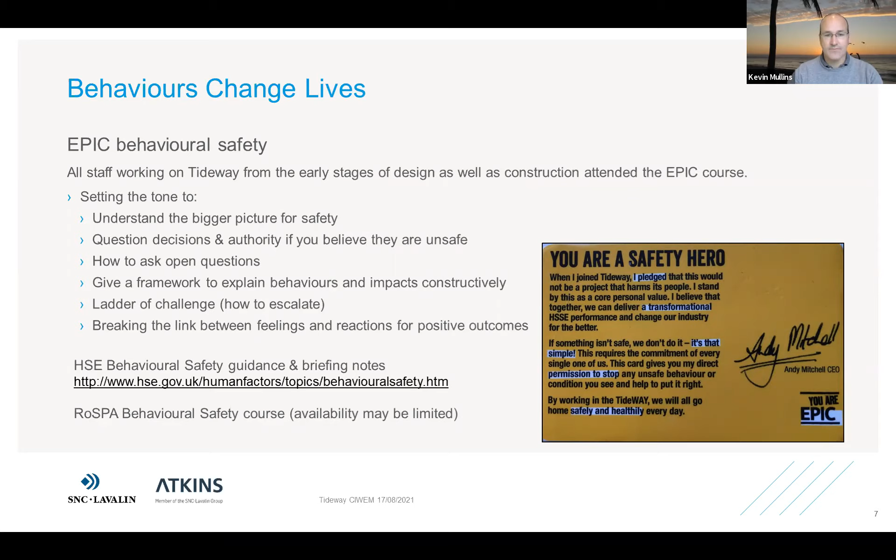So the project itself is split up into 3 sections: west, central and east. Each of them have their own challenges, not least of which is the geology. The main tunnel itself, stretching from Hammersmith to Abbey Mills, is 25 kilometres. The diameter is between 6.5 to 7.2. I believe the standard measurement for these is double-decker buses, so you can fit 4 double-decker buses within the cross-section

of the tunnel. And it falls from the west all the way to Abbey Mills pumping station in the east, where it connects to the Lee Tunnel, which has already been constructed and conveys sewage flows out towards the Beckton sewage treatment works. When completed, the tunnel itself will be able to hold 1.6 million cubic metres of water or sewage. Again, the standard unit of measurement for this is Olympic swimming pools. So it'll be the equivalent of 600 Olympic swimming pools.

Stuart and I were involved in the west section as part of the Atkins Arab joint venture. I'm going to just go through a very high-level background. At the end, I have a link to the Pipeline Industries Guild talk by the Tideway West engineering manager, Colin Murphy, who provides a lot more detail about some of the background information should you wish to investigate that further.

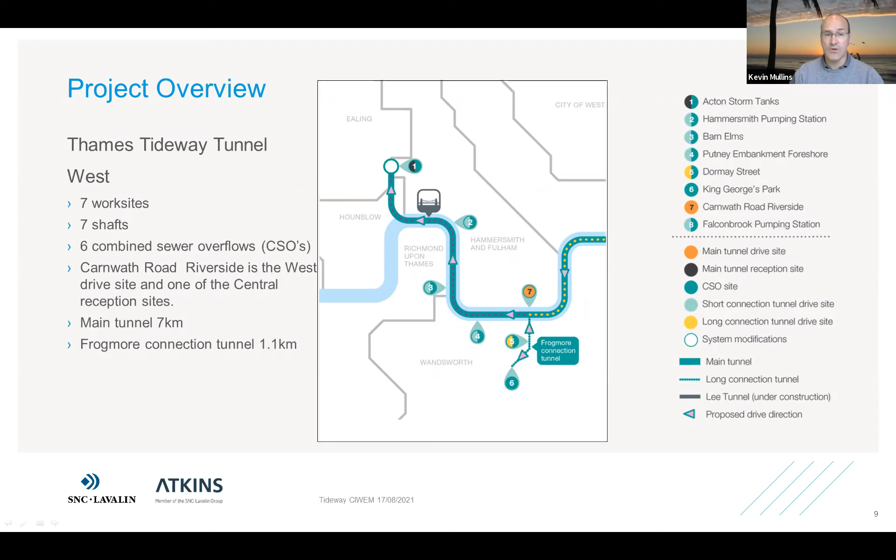I started the tender on Tideway in 2013, and upon planning approval in 2014, we were awarded starting works in 2015. At the moment, the west and central sections, the tunnelling has been completed, and the secondary lining is being installed, with the east section well underway as well. It's anticipated that all works, including commissioning, will be finished by 2025.

So why did we need this project? The main aim is to improve water quality. London is a conglomeration. Very much it was built up rather than planned. And a lot of the rivers of London were subsequently culverted over, and what were the open sewers became culverted sewers, and then placed into the river through overflows. The Thames Tideway project aimed to reduce the number of CSO discharges.

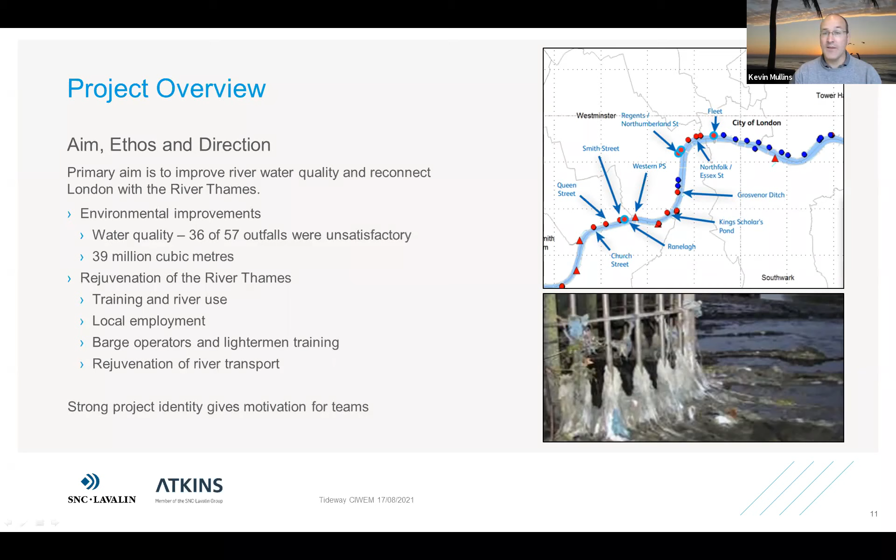And not just here, but there are many high-profile locations. So Putney is the location of the university boat race where they start, and there was a condition that the site would be required to be used by the boat race to start. As it happens, due to the COVID shutdown, the boat race hasn't taken place, but provisions were in there in order to protect the markers for the boat race and to be able to shut down site operations. And similar provisions were in place for the Chelsea Flower Show and other key events down the river.

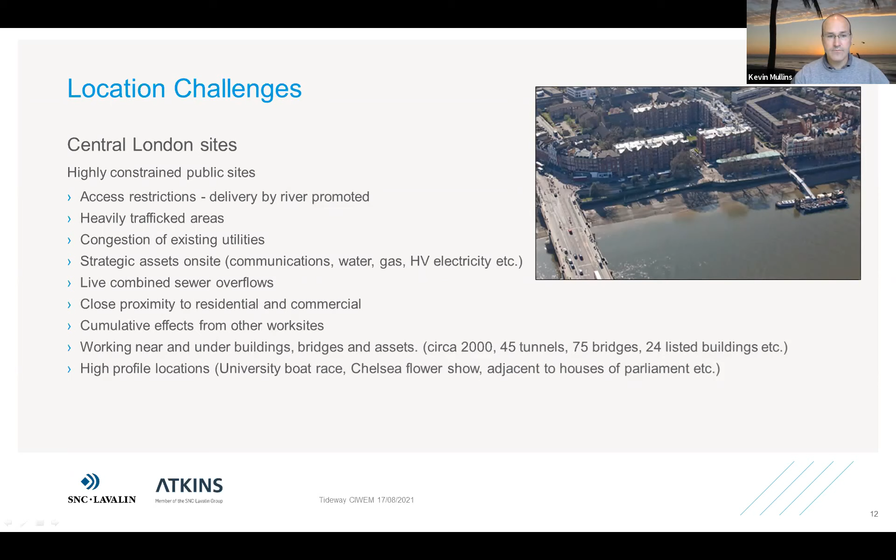So what does a site look like? Using Putney as the example, the main sewer is within the embankment or the road itself. And then there's an overflow typically, which allows the sewage to overflow into the Thames. And this is where we would capture it. In this case, we had an end cap, but other places we intercepted the overflow pipe or attached an interception chamber to the side of an existing pumping station, like at Hammersmith.

So the interception chamber here, underneath the bridge, allowed the overflows to drop down into the connection culvert, which linked the interception to the main site. On many sites, this was short, but on Putney, we had the existing slipway. The slipway was required for access, not just by boat users, but there's also a provision for river haulage historically to be able to access the river at this location. That meant there were a number of design challenges around boat loading, boat grounding, scour, and environmental reinstatement of the riverbed, which were all required to be managed as part of the design.

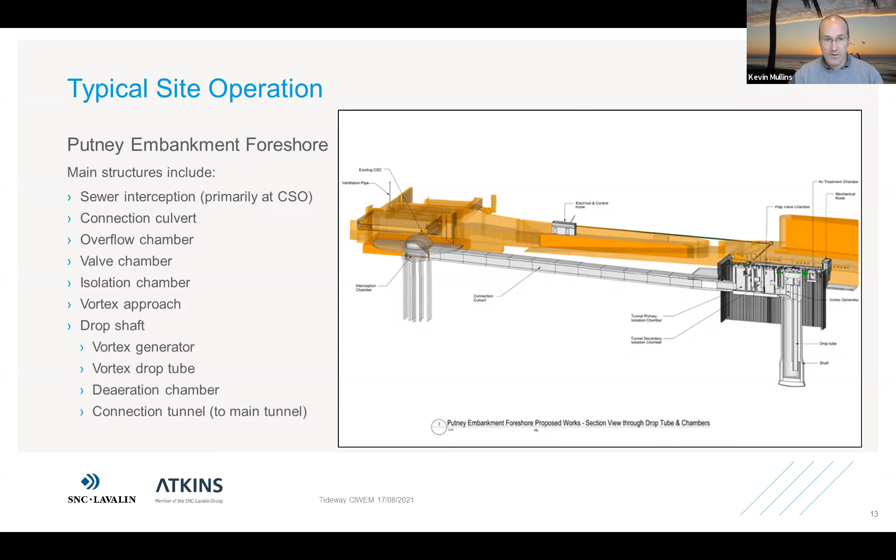Let me find my mouse. Okay, Stuart will talk you through the hydraulic principles. Thanks, Kevin.

Right, as Kevin said, we need to drop the flow from fairly high level, like near ground level, into the main tunnel. And we don't just drop it into the main tunnel, we drop it in a shaft, and then there's a little tunnel from the bottom of that shaft into the main tunnel. There are two real parts to these structures.

There's the top part, which we call the vortex generator, where the flow comes in through a tapering channel that's also sloped like a ramp, and that gives us a spin to the flow that then drops it down the drop tube to the bottom where we let all the air out safely, and then it's connected into the main tunnel. There was quite a well-developed reference design from Tideway, which we were given, but we then had to develop that into detailed design so that our colleagues in the joint venture, BAM Nuttall, etc., could actually build it.

So we were particularly interested in some of the geometry. We had quite onerous specifications on velocities, freeboards, gradients, make sure everything's self-cleansing, which leads you to certain velocities. So we used a whole host of industry standard methods, things like CIRIA 141 for sediment transport, to show that in that long section of culvert we wouldn't get things dropping out, that it would all make it into the vortex generator.

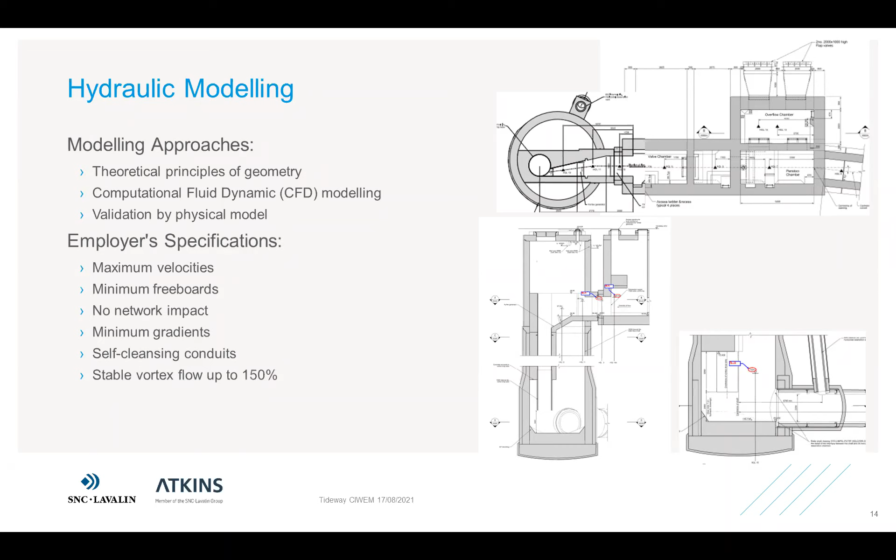So the ramp and the taper comes from a paper by Yu and Lee, Hydraulics of Tangential Vortex Intakes in Urban Drainage. That is the reference paper that the geometry is all based on. We did size these to meet certain client specific requirements, one of which is the 150% stable flow thing. The other things to note here are, as the flow comes down the ramp, we've normally got a hydraulic control and break point at the lip of that ramp, which it's important that we maintain, so that gives us a defined depth to flow ratio, so that if you can measure the depth, you can measure the flow, which is important later on.

But as the flow comes down that ramp and then hits the circular drop tube, it starts to spin, and you have to make sure that once the flow has gone through its first 360 degrees, the depth of flow in the tube isn't high enough to affect the upstream depth at the lip, so that at all times you know what depth you should be getting for a given flow rate. And I'll come on to that in some of the other things we did with CFD and physical modeling on how we validated all of that.

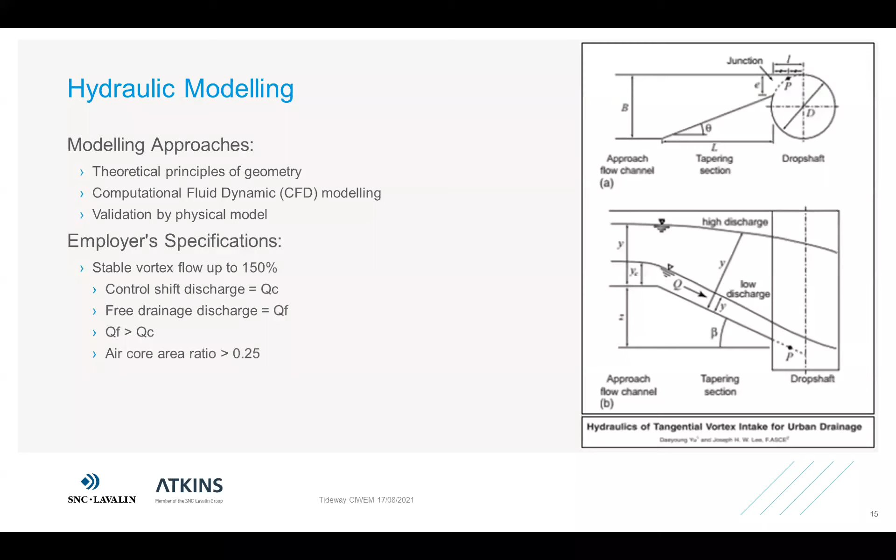Another client requirement was that the minimum width of the taper, I think, is 550 mil, so that it can't get blocked by large debris. So there are things over and above what's in the academic paper that as engineers we have to consider. So next slide.

So this is some of the validation that we did. We used CFD, and as Kevin has alluded to, the design team was a joint venture between Atkins and Arup, and it was a blended design team. So sometimes the CFD was done by Atkins, where we use STAR-CCM+, and sometimes it was done by Arup. They used a thing called OpenFOAM. And as Kevin will come to later on in the presentation, you didn't really know in the design team who people work for.

It was a completely blended team. So there we can see some of the standard sort of images you get from CFD, and also some of the physical model images. We'd also worked out, using traditional 1D calculation methods, what we thought the levels would be for given flows. And when we had that, we could then compare that with outputs from CFD and from the physical model. And we got very good agreement on that, which gave us the confidence that the design was robust.

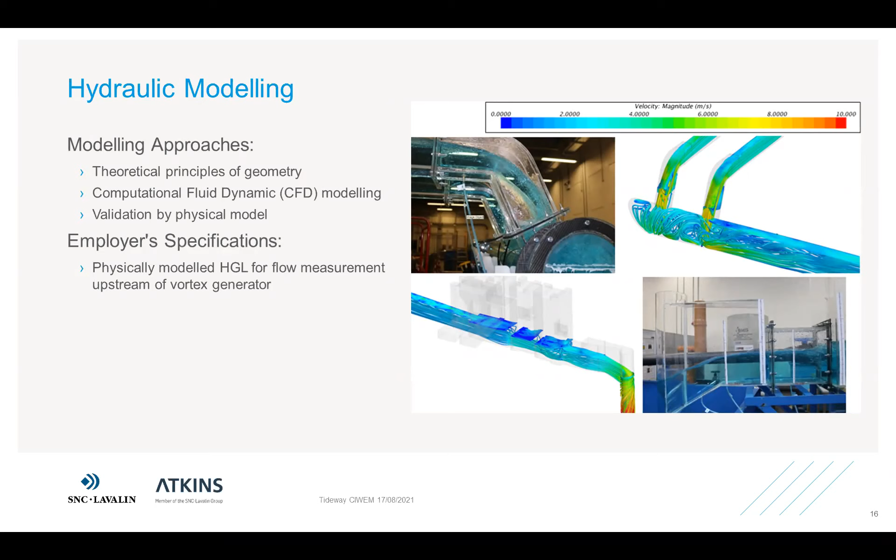The reference design had an external vent pipe as well, which meant it would be quite a difficult connection to make, because we've got to excavate down approximately, I think it was about 25 meters from ground level to where our little connection tunnel is. That was quite an awkward connection to make, and you'd also have to maintain it.

There were all sorts of discussions around how we could protect that, because the main shaft is inside a permanent cofferdam that was designed for certain barge impacts and things like that. But even then, we were worried that there was a point of failure with that vent pipe. So we thought we could maybe design that out, which led us on a bit of a journey. The starting point of that journey was to look at it in CFD. So we did it in CFD with and without, and that was telling us that we could probably remove it.

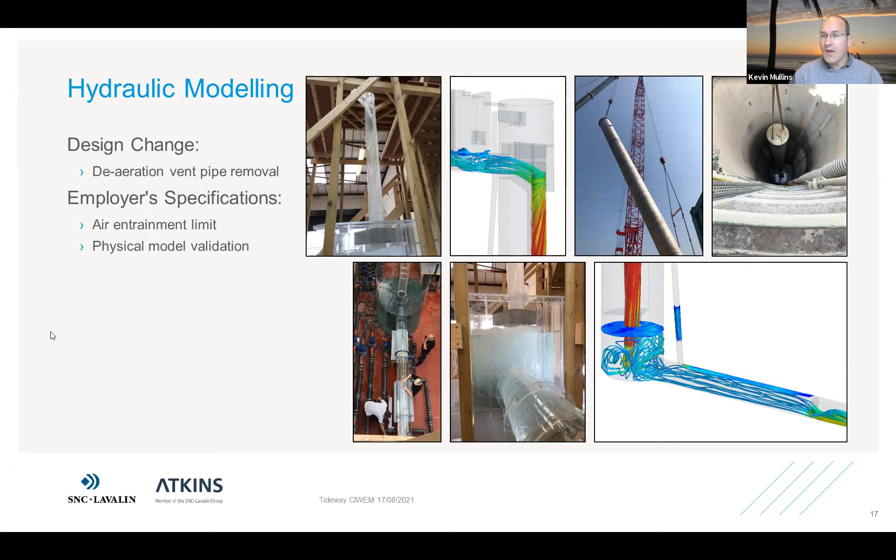The sheet piled elements also formed flood protection, and so they formed permanent works, but in the temporary case they were extended higher to form both edge protection and flood protection, and then they were able to be cut down to their permanent level to be retained for the work. So being quite efficient with as much of the permanent elements as we can.

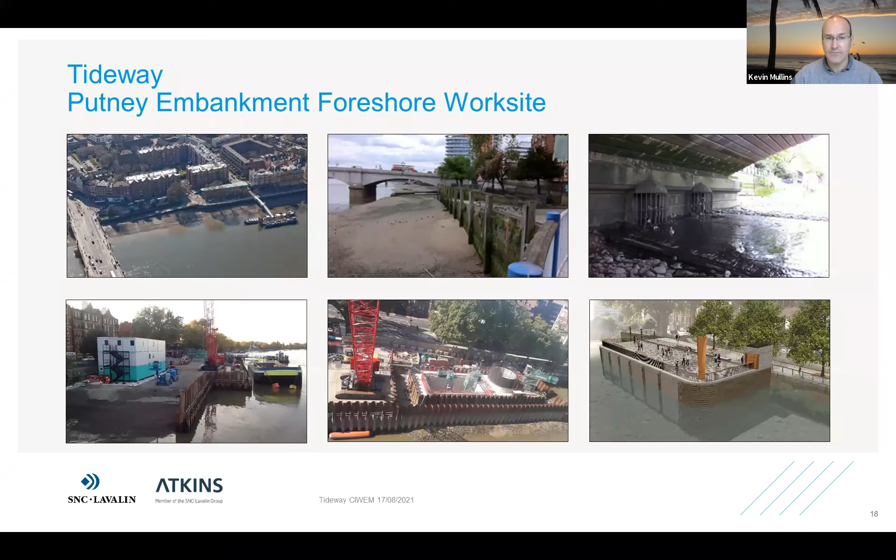Some of the problems we were facing as design challenges were differential settlements, with the large interception chambers wanting to settle more, and then the connection culverts wanting to be buoyant, and the differences between those needed to be tied in and managed in order to prevent any steps and allow the free flow of the water through. So with the more rigid connection tunnel, we were able to prove the beaching of vessels above resisted that. Because it was tied in, it resisted flotation, and we were able to manage the forces on the interception chamber, and tie that in and make it work as a whole.

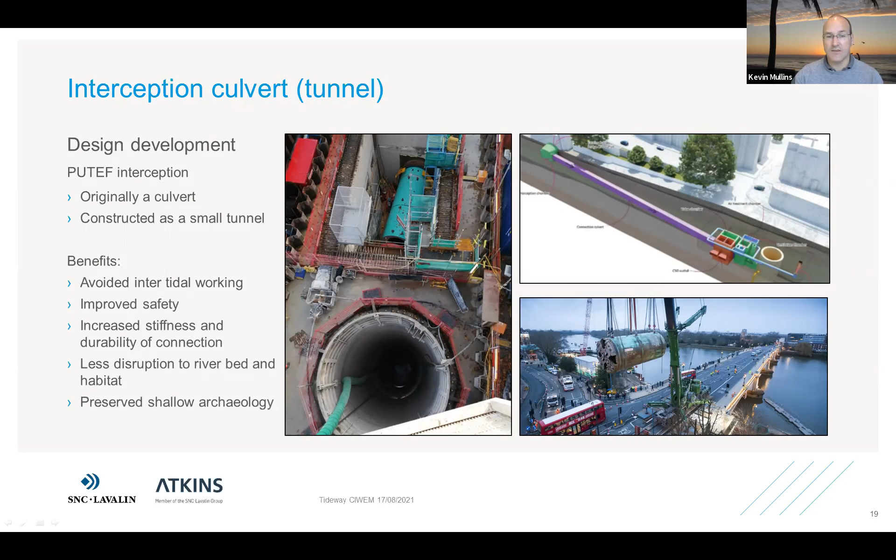Now, we didn't do this alone. The design venture was Atkins, a well-established partnership that had worked on Crossrail and other successful projects. And the tips are really an open and honest relationship, setting it up from the beginning to be collaborative, and having that willingness to share and collaborate over confrontation really set the scene for us to be fully integrated. And as Stuart was saying, quite often both Tideway and the contractors couldn't tell who was from which party because we were fully integrated through that team.

The contractor itself was a mixture of the three main contractors, BAM Nuttall, Morgan Sindall and Balfour Beatty, and they were also co-located with us in order to develop those joint methodologies and techniques. This was all facilitated by a common data environment, we used ProjectWise, and sharing the models to achieve BIM level 2 compliance.

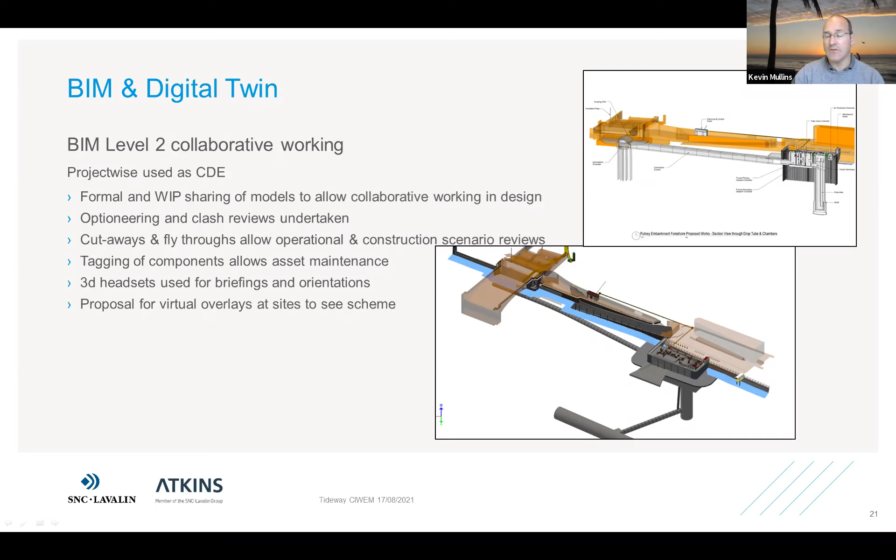You could then discuss what was observable from each of the platforms, and we were able to prove through the models the CCTV surveys, where we were able to drop a virtual camera through and take images all the way down, and prove a way of maintaining and reviewing the condition and de-risking a lot of the man entry requirements. We have skimmed through a lot of this information. Having worked on it for a number of years, there are many aspects that we could go into in detail.

But two excellent sources of information, one of which is the Tideway website itself, where you can look at all of the sites across the scheme, track the tunnelling machines and the progress, and they also put in updates to show how the different sites are progressing. It's very exciting that Putney is receiving all of its cladding at the moment. So they're putting on the granite cladding, and the outfalls will be fitted very shortly.

As I mentioned at the beginning of the talk, Colin Murphy, who we worked with closely, undertook a talk for the pipeline industries, and that goes into some of the background about the history and how Bazalgette improved and how we're building upon the good work, and also the historic flows of the sewers. So should you wish to investigate a bit more of the history, those are excellent sources of information.